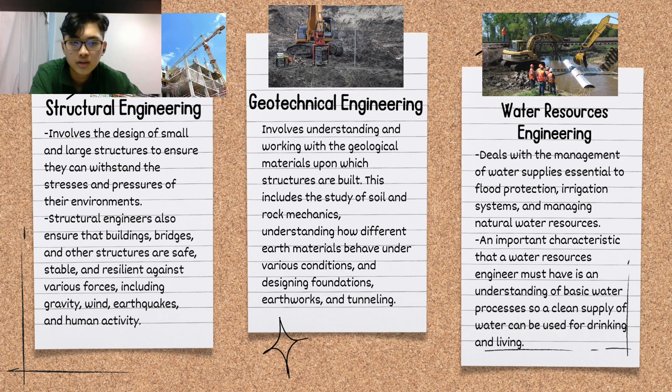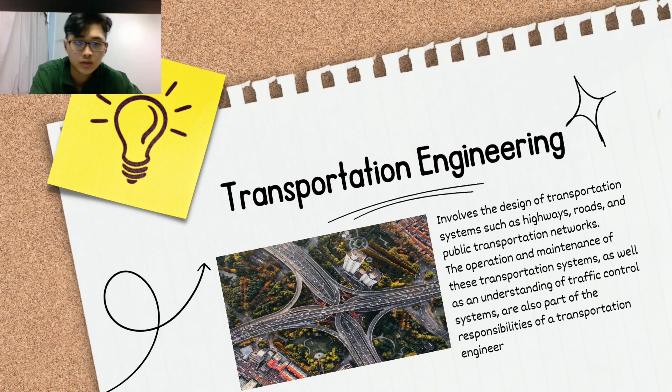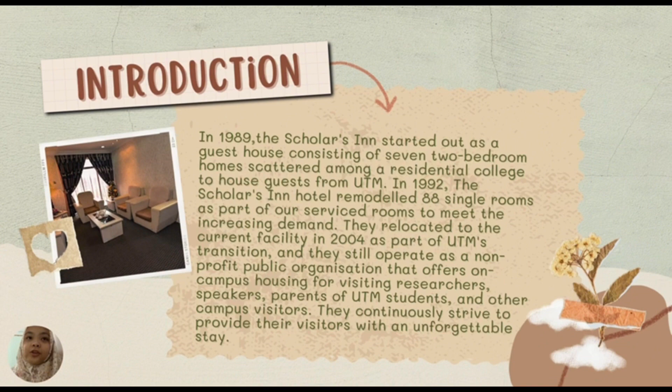In 1989, the Scholars Inn started out as a guest house consisting of 7 two-bedroom homes scattered among a residential college to house guests from UTM. In 1992, the Scholars Inn Hotel remodeled 88 single rooms as part of a service room upgrade to meet increasing demand. They relocated to the current facility in 2004 as part of UTM's transitions, and they still operate as a non-profit public organization that offers on-campus housing for visitors, visiting researchers, speakers, parents of UTM students, and other campus visitors. They continuously strive to provide their visitors with an unforgettable stay.

The architectural concept is integrated with the academic environment. The goal is to keep the hotel's own character while blending in with the neighboring academic community. Second, functionality and comfort: the architectural idea incorporates well-planned guest rooms, common areas, and facilities. Third, community engagement: the Scholars Inn has areas intended to promote social interaction among visitors, strengthening the feeling of community in the UTM campus.

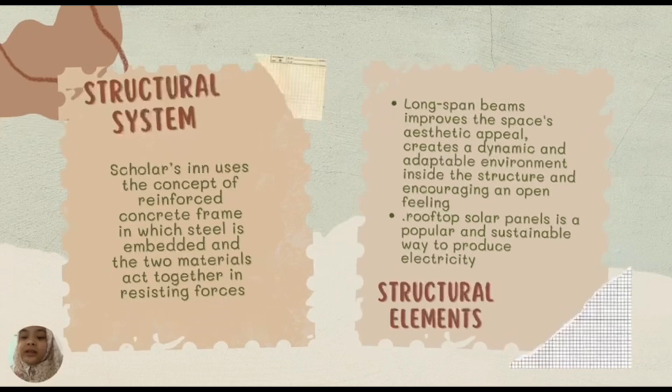Next is the structural system. Scholars Inn uses the concept of a reinforced concrete frame, in which steel is embedded and the two materials act together in resisting forces. The structural element is long-span beams, which improve the space's aesthetic appeal, create a dynamic and adaptable environment inside the structure, and encourage an open feeling. The next feature is the rooftop solar panel, a popular and sustainable way to produce electricity.

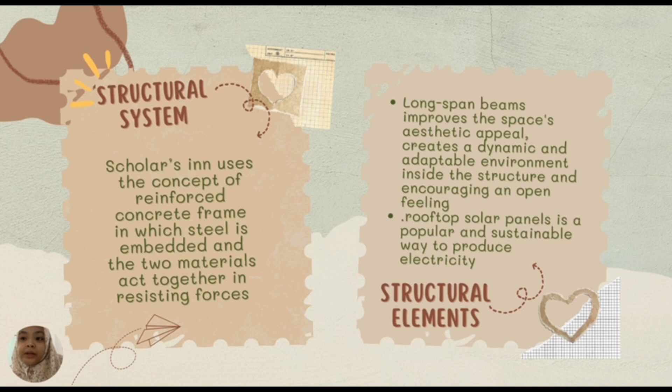The last aspect is the materials used. First is glass, used to cover the panel of the window, with the ability to both let light into the room while keeping inclement weather outside. Second is wood, which has low heat conductivity, small bulk density, relatively high strength, and amenability to mechanical work. The last one is concrete, which is not burned and is a fire-resistant material. Besides, it is useful for commercial building projects as it is available in many colors or finishes.

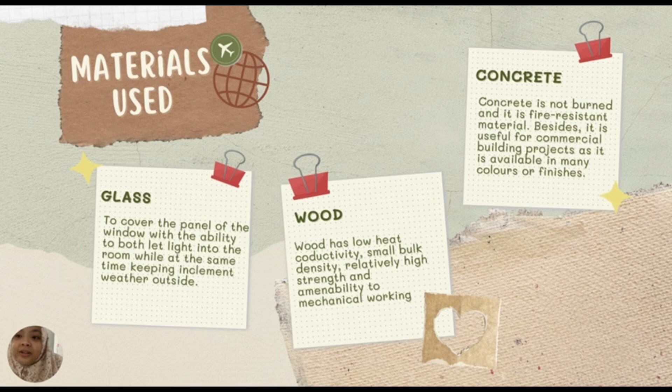Second assignment from Group A, Section 1, discusses issues on geological, geotechnical, and transportation engineering along with real-life cases. Firstly, issues related to geological engineering: one factor causing issues in geological engineering is high rainfall and erosion. Tropical climates often experience heavy rainfall, leading to soil erosion and instability, which can affect the stability of slopes, embankments, and foundations, requiring engineers to design structures that can withstand this erosive force.

Next is flooding and drainage. Tropical regions often experience seasonal flooding, exacerbated by heavy rainfall and topographical factors. Proper drainage systems are crucial to prevent waterlogging and structural damage. Engineers must design effective drainage solutions to manage excess water.

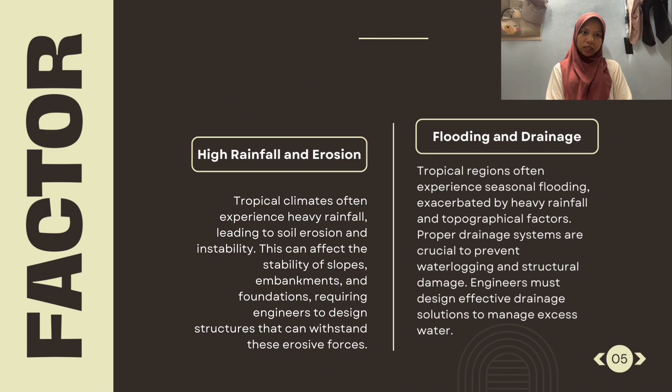As for the solution, we can conduct site investigation and geotechnical studies to understand the local geological conditions, analyzing soil properties including soil type, moisture content, and expansive characteristics to inform foundation design. We can also give more attention to flood management and drainage by developing comprehensive drainage systems to manage excess water during heavy rainfall and flooding, and incorporate green infrastructure and sustainable drainage practices to enhance water absorption and reduce runoff.

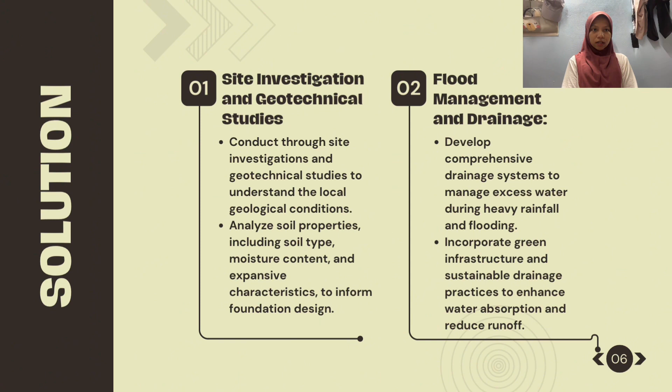Furthermore, we investigate the issues that occur in geotechnical engineering. One of the factors is foundation settlement.

Consider a construction site where a hillside needs to be excavated for a new building. The geotechnical engineer must assess the slope stability to prevent landslide or slope failure during and after construction. Factors such as soil type, slope angle, groundwater condition, and potential loading need to be considered.

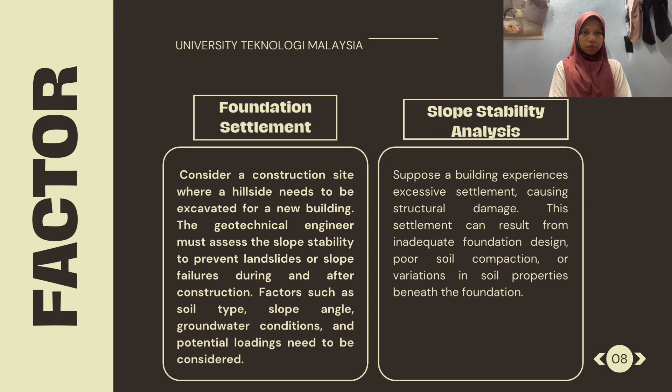Next is slope stability analysis. Suppose a building experiences excessive settlement, causing structural damage. This settlement can result from inadequate foundation design, poor soil compaction, or variation in soil properties beneath the foundation.

As for the solution, we can perform stability analysis using methods like the Bishop method or the limit equilibrium method. The engineer might recommend measures such as installing retaining walls, soil reinforcement, and adjusting the slope angle to ensure stability.

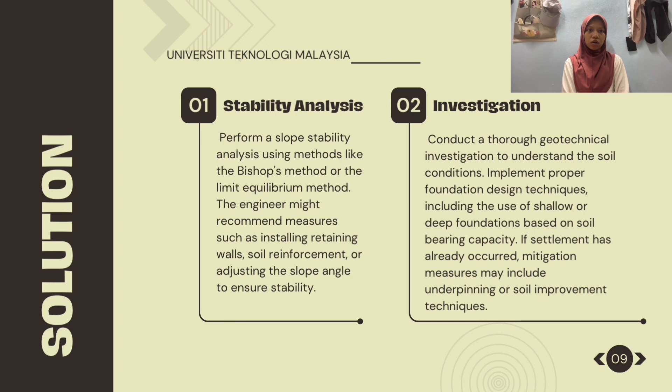Next, we can also conduct a thorough geotechnical investigation to understand the soil condition. Implement proper foundation design technique, including the use of shallow or deep foundation based on soil bearing capacity. If settlement has already occurred, mitigation measures may include underpinning or soil improvement technique.

Moving on to real-life cases, issues on geotechnical engineering elaborate on problems encountered in construction projects carried out by PWD, namely the Core Facilities Building of Polytechnic Kota Kinabalu in Sabah and Hospital Tengku Ampuan Rahimah Integration Quarters in Klang, Selangor.

Instability of the ground during construction work had caused delay and cost overrun in completion of the project in Selangor, whereas occurrence of continuous post-construction settlement has affected the integrity and serviceability of the building in Sabah.

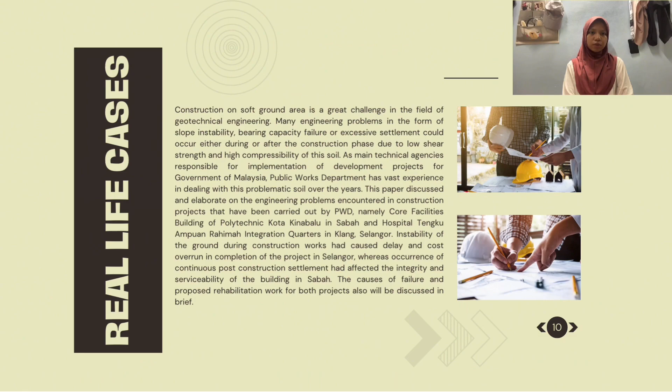Moreover, this assignment also talks about the issues on transportation engineering. As for the issues, it involves tropical storm and hurricane, where structures such as bridges and signage must be designed to resist the high wind associated with tropical storms and hurricanes. Wind-borne debris during storms can potentially endanger transportation infrastructure.

Besides, high temperature and sun exposure also make an impact. High temperature can cause concrete surface to deteriorate, creating cracking and rutting. Also, intense sunlight can expedite the aging of material, shortening their lifespan. Extreme heat can cause significant thermal expansion and contraction of road and bridge components, resulting in structural distress and deformation.

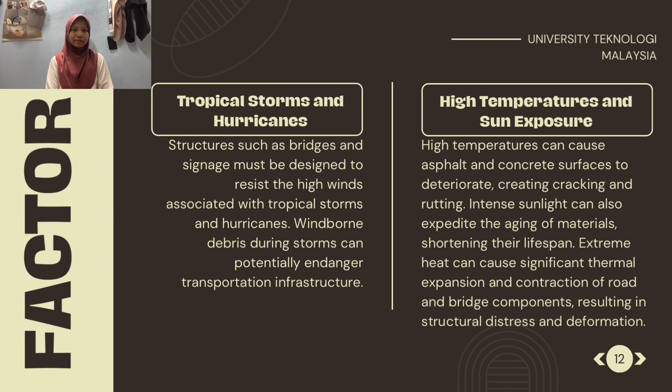The solution for the issues are: design structures to withstand high wind and flooding caused by tropical storms, to improve public safety during extreme weather occurrence, implement early warning systems and evacuation routes, use heat-resistant asphalt material and cool pavement technologies.

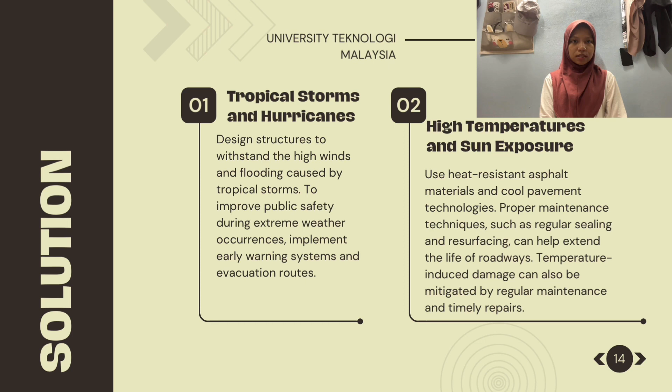Proper maintenance techniques such as regular sealing and resurfacing can help extend the life of roadways. Temperature-induced damage can also be mitigated by regular maintenance and timely repairs.

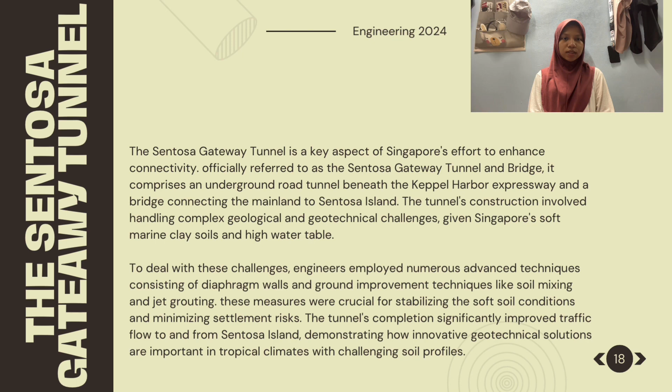One real-life issue is the Sentosa Gateway Tunnel, a key aspect of Singapore's effort to enhance connectivity. Officially referred to as the Sentosa Gateway Tunnel and Bridge, it comprises an underground road tunnel beneath the Keppel Harbour Expressway and a bridge connecting the mainland to Sentosa Island. The tunnel construction involves handling complex geological and geotechnical challenges given Singapore's soft marine clay soil and high water table.

Then we move on to assignment 1 for Group B, which is about hydraulic and water resources. The first thing is about climate change.

Climate change refers to long-term changes in weather, oceans, land, and ice sheets over decades or longer, usually at least 30 years. It can be caused by natural processes like the sun's radiation or human influences such as changes in the atmosphere, land use, food production, and transportation.

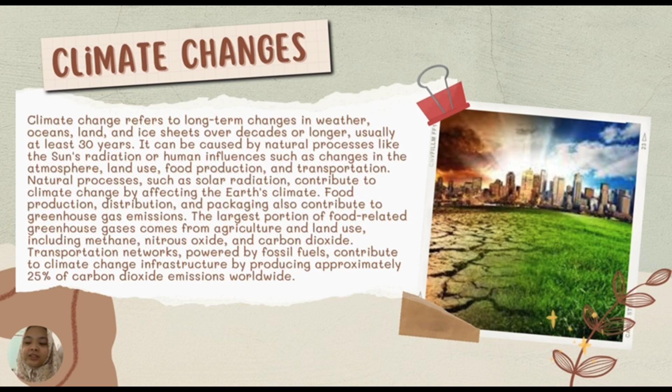Natural processes such as solar radiation contribute to climate change by affecting the Earth's climate. Food production, distribution, and packaging also contribute to greenhouse gas emission. The largest portion of food-related greenhouse gases come from agriculture and land use, including methane, nitrous oxide, and carbon dioxide. Transportation networks powered by fossil fuels contribute to climate change by producing approximately 25% of carbon dioxide emission worldwide.

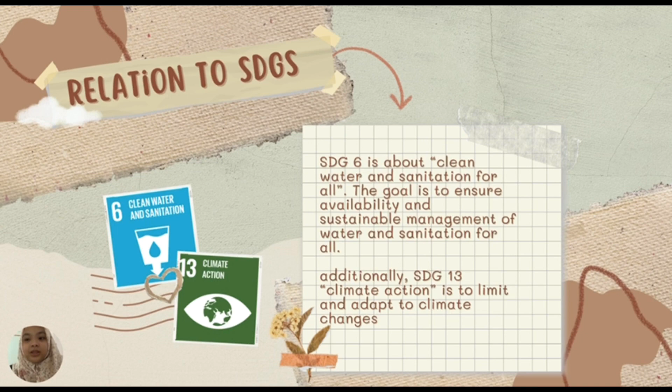Next, what is the relation to SDGs, the Sustainable Development Goals by the United Nations? It is related to SDG 6, which is about clean water and sanitation for all. The goal is to ensure the availability and sustainable management of water sanitation for all. The second one is SDG 13, climate action, which is to limit and adapt to climate changes.

The second topic is about tsunami. A tsunami is a long wave that originates from the sea and undergoes shoaling as it approaches land. Shoaling increases wave amplitude as it transitions from deep to shallow water, particularly near the coast. The 2004 Boxing Day tsunami, a devastating tsunami, reached heights of up to 30 meters, causing immense loss of life and property.

Tsunamis are sometimes referred to as tidal waves and can vary in height from a few centimeters to over 30 meters. It is crucial to be aware that not every earthquake or volcanic eruption will cause a tsunami or cause significant damage. What is the shoaling process?

Wave shoaling is the change in wave shape and behavior as waves propagate into water of decreasing depth, causing a decrease in speed and wavelength while increasing the wave height. This process is unaffected by water depth in deep water but affected in shallower water.

Waves shift as they enter shallow water, with crest becoming sharper and trough flattening and widening due to depth change. Wave shoaling can occur in any wave controlled by the seabed, both linear and non-linear. It is most readily observed for prolonged periods of swell approaching a coastline. Tsunami waves become dangerous only when they approach the coast, as wave shoaling increases as the water becomes shallow.

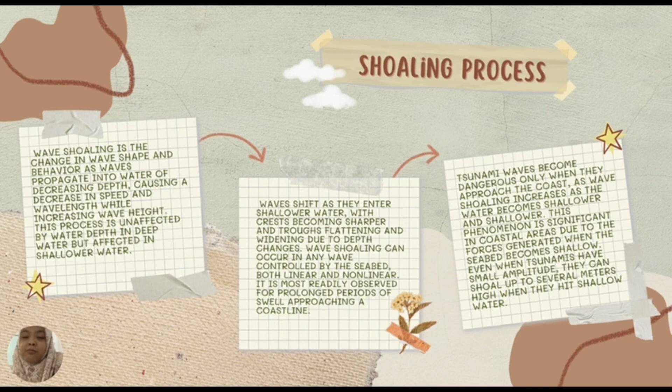This phenomenon is significant in coastal areas due to the force generated when the seabed becomes shallow. Even when tsunamis have small amplitude, they can shoal up to several meters high when they hit shallow water.

So that's all for assignment 1. Next, moving on to the second assignment, the water and energy consumption. We will discuss the average consumption and how to calculate the average energy consumption per month, per person per kilowatt hour, and strategies to reduce the consumption of water and energy.

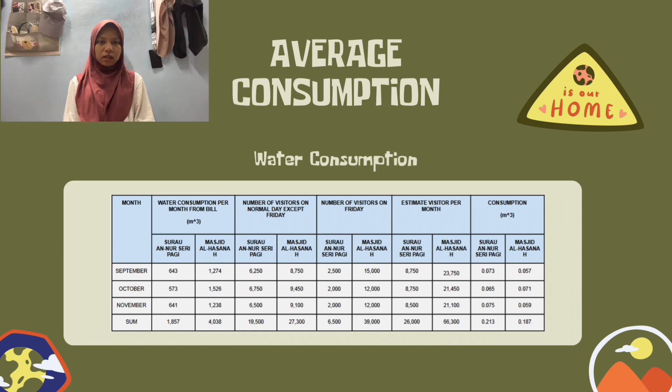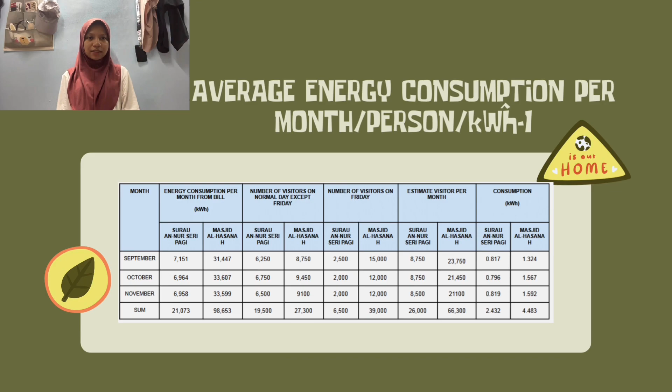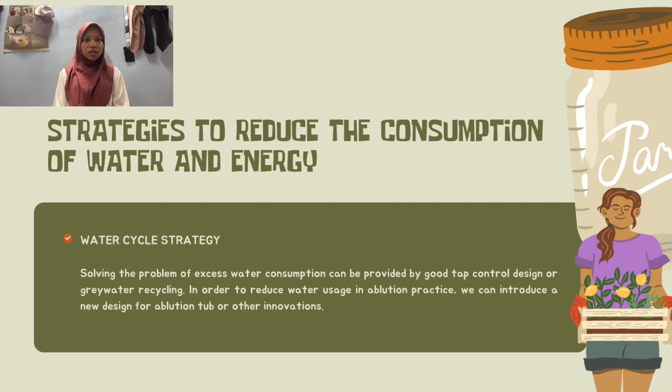Firstly, water cycle strategy. Solving the problem of excess water consumption can be provided by good tap-controlled design or grey water recycling. In order to reduce water usage in ablution practice, we can introduce a new design for ablution tubs or other innovation.

Next, automation, control and monitoring strategy. Automation of control and monitoring of mosque facilities and energy consumption such as electricity, heat, and water is described in this work. By using sensors and actuators throughout the mosque building, human intervention can be significantly reduced, which can significantly reduce energy waste due to human error.

Extracting knowledge or delivering information through statistical analysis and machine learning approach. This action is also considered important due to its ability to conduct prediction of future issues, pattern recognition, data classification and clustering, and also insightful information presentation based on current collected data as discussed in the previous work. As a consequence, the mosque service to the visitor can adapt to any situation and condition.

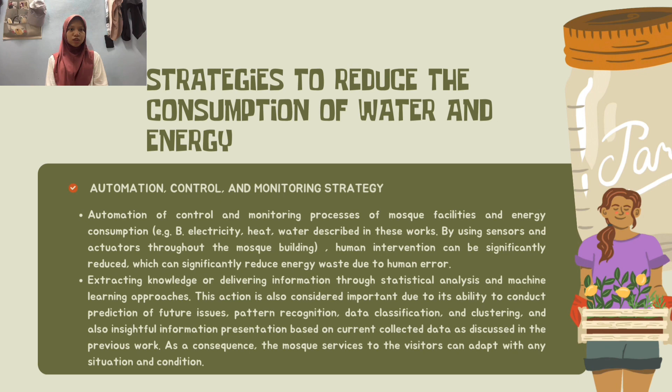Lastly, heating, ventilation and air conditioning strategy. The HVAC system's main purpose is to meet the thermal comfort and certain criteria. HVAC activated sensor technology also offers significant benefits and supports the sustainability of mosques. Therefore, when there are no prayers, the system will automatically turn off.

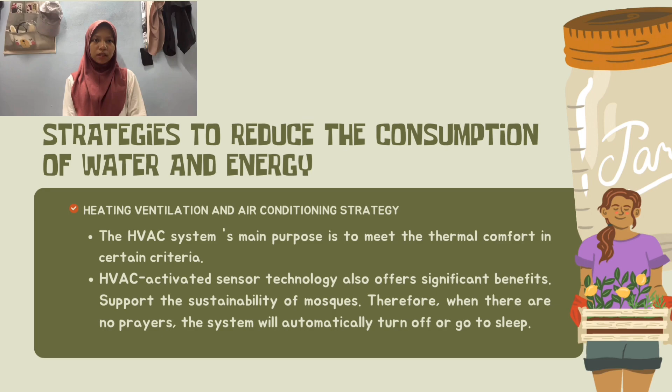So we will discuss the summary of all the subfields of civil engineering. The first subfield assignment is structural engineering from Group 8 K1S1. We discuss the structure of a building. The building we chose is Scholar's Inn, and we discuss the structural system, the structural elements, materials used, and interesting features that we can add to the building.

For the second subfield assignment is the geological, geotechnical, and transportation engineering, also made from Group 8 K1S1. We discuss the issues on geological, geotechnical, and transportation, and the real life cases and ways to prevent them.

As for the third subfield assignment, produced from Group 8 K1S2, that is hydraulics and water resources engineering. They collect the data of water and energy consumption of two buildings, then calculate the average of it, and compare the data of the two buildings. After that, they also discuss how to reduce the water and energy consumption of the buildings.

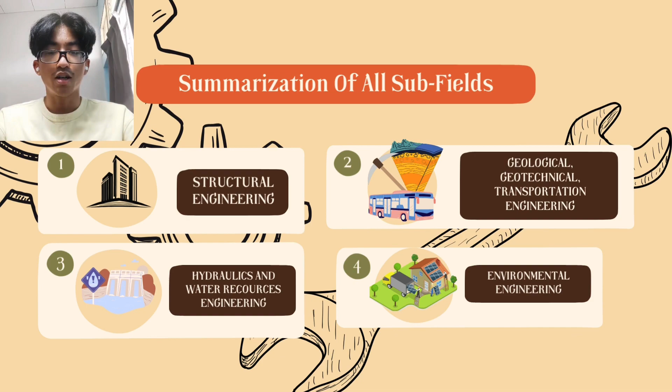The last subfield assignment is environmental engineering, also produced by Group 8 K1S2. They discussed the causes of climate change and explained the statement, relating it to the Sustainable Development Goals (SDGs) that can be applied to the whole world. They also discuss how the tsunami occurs and the shoaling process.

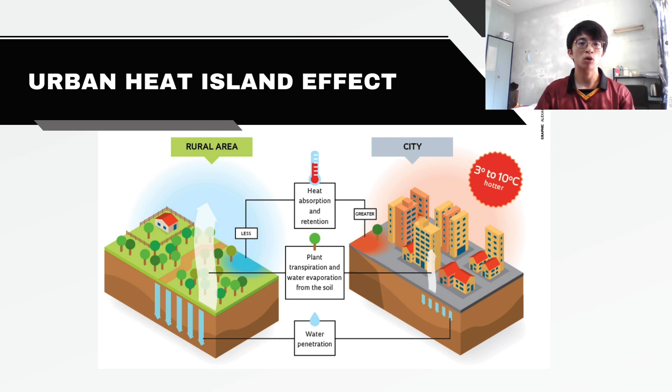For the extra question, the first issue is the urban heat island effect. The heat absorption and retention of rural areas is less than the city due to plant transpiration and water evaporation from the soil, causing a difference in water penetration. We can solve this issue through using green infrastructure. For example, incorporate more green space, parks and urban forests to increase vegetation cover, which helps in reducing heat absorption and promoting cooling through evapotranspiration.

Besides, we can also use cool roofs and pavements. Implementing cool roof technologies and reflective pavements can mitigate UHI by reflecting more sunlight and absorbing less heat.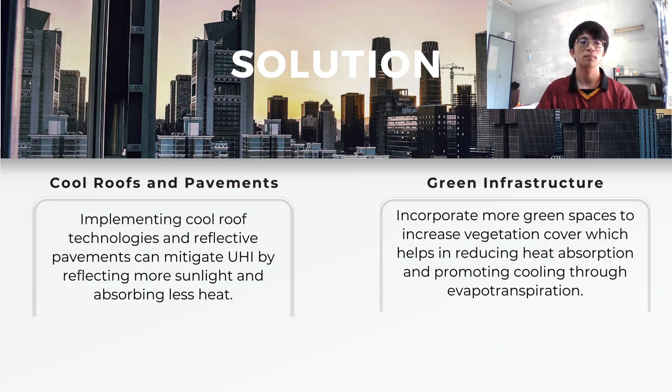Due to factors such as climate change, rising sea levels, and excessive groundwater extraction, seawater intrusion is becoming a critical issue in coastal regions. This phenomenon can contaminate freshwater aquifers, affecting the availability of potable water resources for both urban and rural communities. The solution is maintaining water conservation measures. Government can promote water conservation practices to reduce the demand for groundwater, thus lowering the risk of seawater intrusion. These include the use of efficient irrigation systems and the implementation of water reuse technologies.

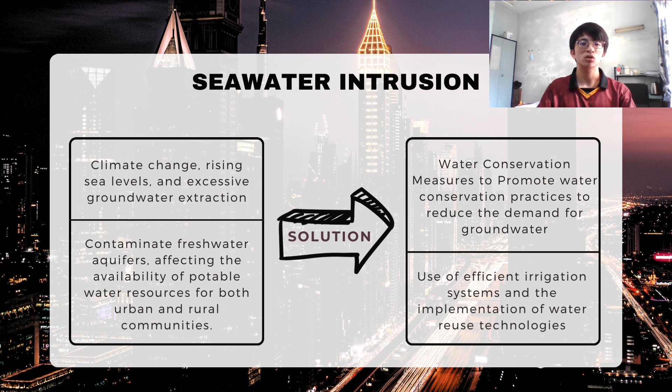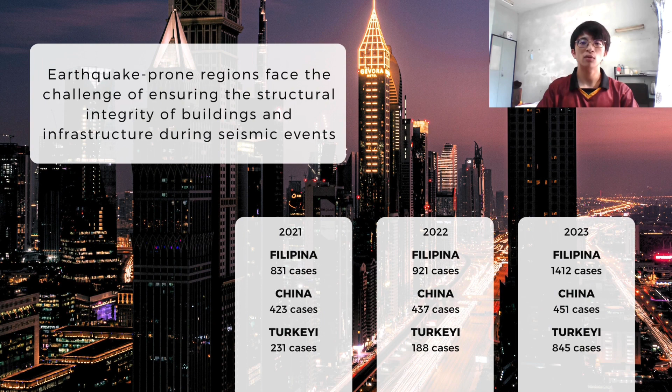The last issue is the earthquake. Earthquake-prone regions face the challenge of ensuring the structural integrity of buildings and infrastructure during seismic events. In recent years, the increased frequency and severity of earthquakes in certain areas like Philippines, China, and Turkey have highlighted the need for robust engineering solutions.

The first solution is using seismic retrofitting: strengthening existing structures through retrofitting technologies such as adding base isolators or dampers to enhance their ability to withstand seismic force. We can also advance new building materials, developing and using advanced materials such as fiber reinforced composites or shape memory alloys to construct buildings with enhanced seismic resilience.

In a nutshell, these issues require a multidisciplinary approach involving collaboration between engineers, urban planners, policymakers, and environmental scientists. Additionally, ongoing research and technology advancement play a crucial role in finding innovative solutions to these emerging challenges in civil engineering.